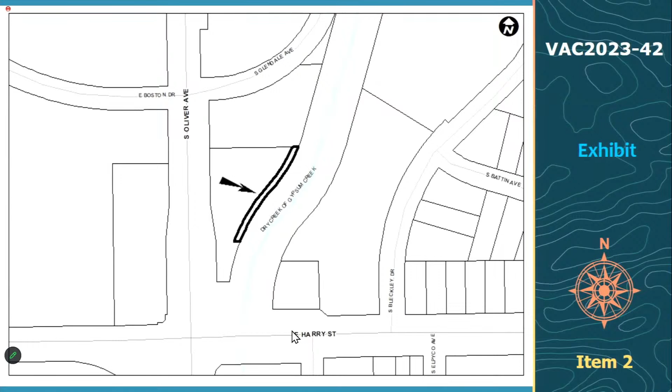If you want to go to the site plan, please. There's an existing building on the property, and they're looking to raze the existing building and redevelop it with a different building and orientation in the parking lot.

The FEMA floodplain shows most of the site in the AE FEMA floodplain except for the current building pad. The applicant intends to raze the existing building. Any new construction would have to follow any FEMA regulations regarding changes to the floodplain.

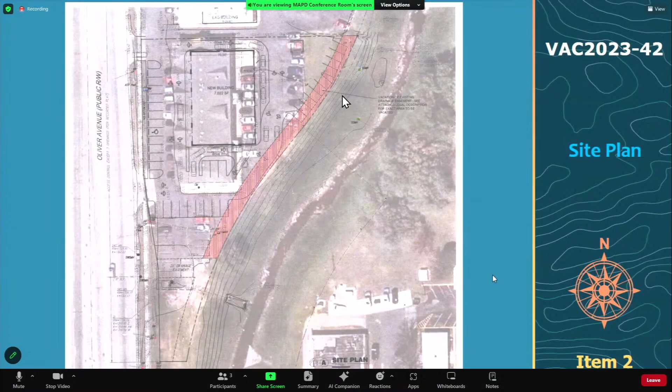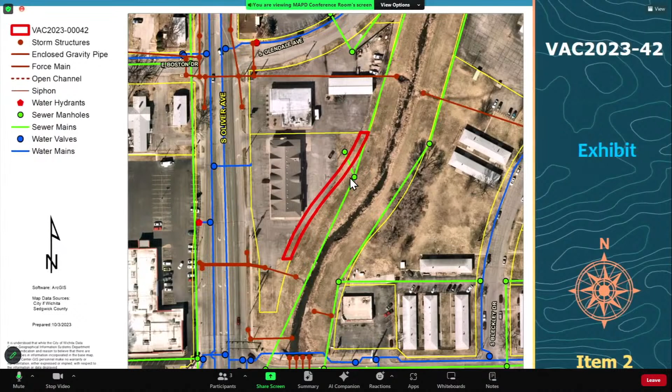There are no public utilities in the area being vacated. There is a sewer extension that crosses - if you go to the aerial map, please. On the original aerial map that we had in your packet, it showed that it crossed, but Public Works did some research on the actual location, and it was determined that that sewer extension was actually not on any private property, so there's no need for any easements to cover that extension.

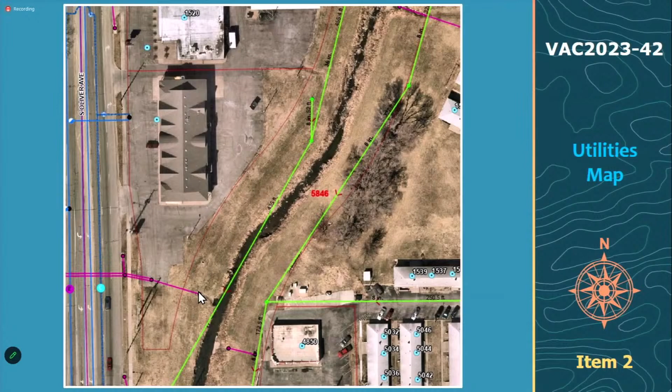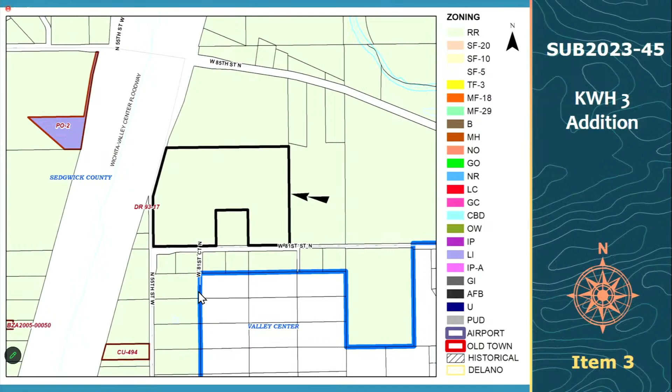Next slide, please. The aerial, next slide. This is the plat as presented. Staff comments, item A should read: the first sentence should read 'since sanitary sewer is unavailable' instead of 'available.' Should read that.

Tests need to be completed for any on-site sewage and/or water wells. Memo shall be presented to MABCD, and soil work is needed. Item B: the applicant proposes sewage lagoons, and the subdivision regulations require 5 acres for lagoons, and lots 1, 2, 3, and 8 do not meet the 5-acre requirement.

So a waiver from sewage lagoon area requirements will be needed. Item C: stormwater management advises that the drainage plan needs to be submitted. Actually, I did get comment back from them that they have approved the drainage plan.

Item D, regarding access controls, joint access controls, there has been a plan that was submitted yesterday, and so it is in the process of Public Works reviewing that plan and submitting comments to address these issues. The new plan that was submitted addresses item E, item G, item H.

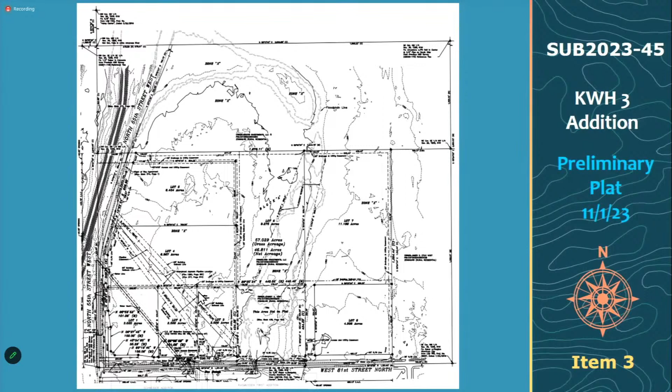Item R, additional surveying comments from that revised plan submitted have been received, and those have been given to the applicant. And item T, Evergy will not need to request any additional easements at this time. Questions? Any questions of staff?

On item E, did you say that with the new layout or new plan, that has been covered? Yeah, they submitted -- if you look at this new subdivision plat that they submitted, for lot 7, what is it, 6 and 7, you can see the 20-foot setback has been platted on there. So that takes care of item E, has been addressed. Okay, thanks. Any other questions of staff?

Thank you. Any other advisory members have anything? Go ahead.

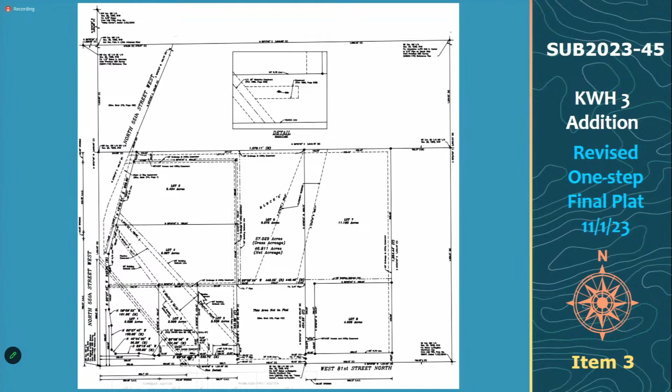This is Daniel Schreiner with Public Works. We did provide comments shortly before this meeting, so you do have those, Greg. I'll just point out with the access controls, as shown on the revised plat, they have extended that joint access agreement between lots 2 and 3 over to lot 1. We need to confine the opening to be across the street from 81st Street Court so that we meet the access control policy. And then I think we also need to work on access to lot 4 on the new plat, but I think we're close enough that we can work through that.

Anybody else? Kelly? Yeah, Kelly Dixon, Metropolitan Area Building. According to item B, where they're talking about the lagoon waiver, the Sedgwick County Sanitary Code limits that to 3 acres for a minimum lot size. So if a waiver would be granted, it would have to limit it to 3. Yes, thank you. Anybody else?

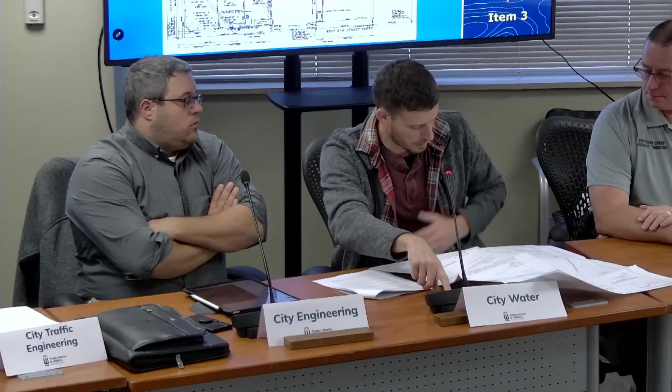Go ahead. Wichita City Water. We just got this a couple days ago, but I just want to get on record that the water line easement that they have going through lots 4, 1, and 2 -- the separate instrument recording information was incorrect, and the easement needs to be 25 feet, not 20. Any other comments? Thank you.

Agent or applicant, please.

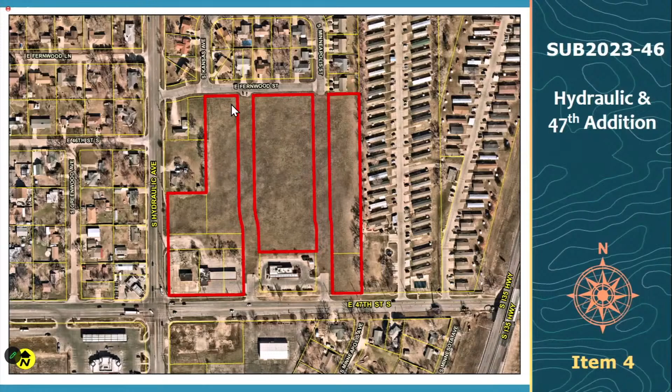which I believe is right there. Next slide, please. Yeah, it's right there. Also Public Works wanted some clarification regarding the sewer easement in Lot 1, Block A. It's along the south here. Per item C, that can be updated. I was informed by City Stormwater the drainage plan has been approved. Standard comment from City Fire per item D, and the street names have been approved by GIS.

Regarding access controls in item F, one opening along Hydraulic has been proposed and 2 street openings along 47th, although there was not access controls denoted there. Traffic engineering is requiring that the Hydraulic approach be limited to rights in, rights out only. They are striking the following comment on the right-of-way dimensions -- the plat is accurate, so that can be deleted. And as I mentioned, access control needs to be denoted along 47th Street South, except for the 2 street openings.

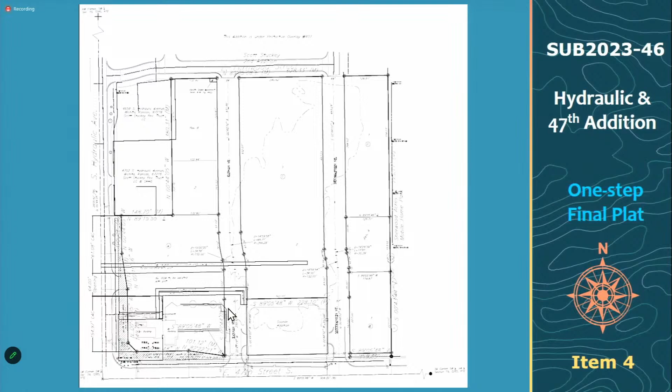Okay, these are the residents that reside just north of Fernwood. The email said that the application is not in conformance with the South Wichita-Haysville area plan, which recommends residential development for the site. If it must proceed as commercial, we request no through streets to Fernwood.

We have concerns of increased traffic that will impact the neighborhood that sits directly north of this proposed development. Having the two proposed through streets from 47th to Fernwood will give the westbound traffic on 47th the opportunity to avoid the traffic light at the intersection of 47th and Hydraulic when wanting to go northbound on Hydraulic.

Also, southbound traffic wanting to go east on 47th will divert through the same way to avoid the traffic light. The last proposal for the property was an RV campground, zoning case 2022-68, and that was to have no through streets to Fernwood. If it is possible to have the same thing done with this new proposal, it would greatly help to keep the current quality of life in the neighborhood.

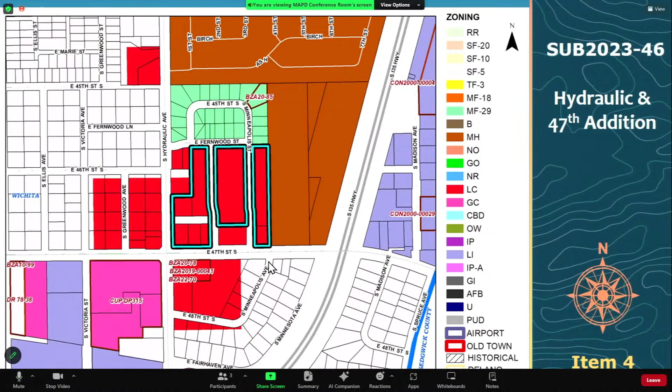Any questions for staff? Any questions of staff? Mike? Yeah, I've got one for traffic.

Can you explain what is going to happen at 47, at the intersection, with regards to what appears to be accel and decel lanes for the turning movement from westbound to northbound? Is that required, or are you just going to be giving them, requiring a 60-foot right-of-way across, completely fronting both Hydraulic and 47?

Was it not a clear question? Yeah, that's what I'm trying to. Okay, well, so part of the comment here is the 60-foot right-of-way is approved, an existing right-of-way of 50 foot plus 10 foot of dedicated right-of-way.

And then I think the comment was made that at the major intersection, the right-of-way platted 250 feet, that is being stricken from what you're requiring. Yeah, basically what that was saying was we were using some information up in our department that was contrary to subdivision regulations, which measured the 250 feet from the section line, not the perpendicular property line.

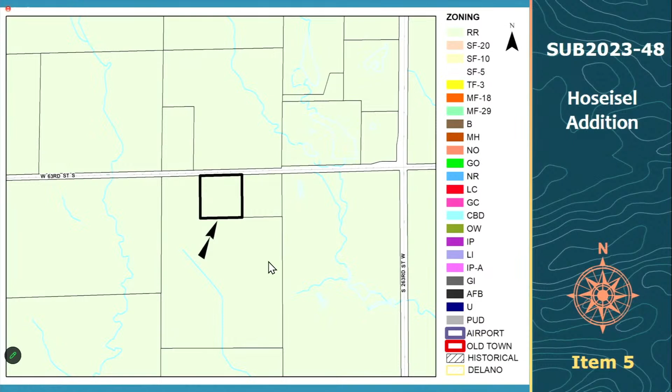Next screen. Aerial, next screen. Like I said, a one-step plat. Staff comments: item A, sanitary sewer and municipal water is unavailable for this property, so MABCD will need a test and memo for any on-site sewage and water wells. Item B, stormwater management advises applicant needs to submit a drainage plan.

Item E, standard county fire department comment regarding service drive. Item F, county public works approves of the access controls—there's one access opening shown along West 63rd Street South. Item G, county public works approves of the right-of-way dedication along West 63rd Street South. And item Q, this area is not located in Evergy territory.

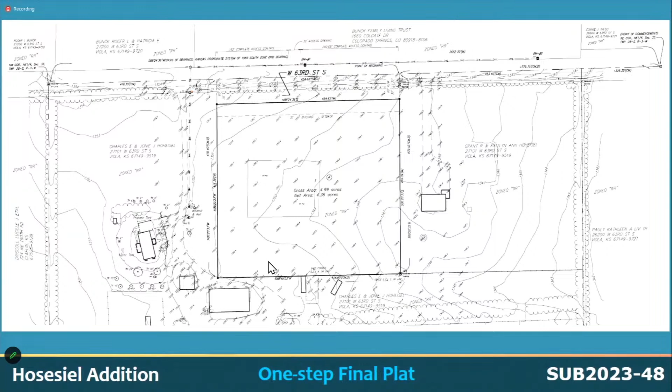So any questions? Any questions of staff? Seeing none, thank you. Any other advisory board members have any comment on this?

Applicant or agent? Chris Rose with Baughman Company, agent for the applicant. The applicant agrees with staff comments, and I'll stand for any questions. Any questions of the agent?

Thank you. Anybody here in the commission chambers want to speak on this item? Anyone want to speak on this item? Seeing none, I'll bring it back to commission. What's the pleasure of the board?

Motion to approve. Second. Got a motion by Mr. Aldridge, second by Mr. John Williams-May. Any discussion? All in favor, say aye. Aye. Anybody opposed?

Is there any other business, Philip? Then we're adjourned.